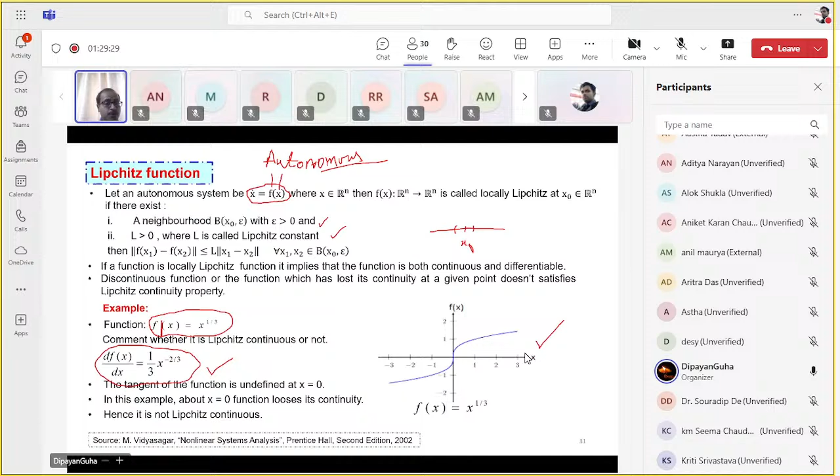Now, before we go into the formal definitions of the Lyapunov approach, let's quickly review some different classes of functions based on which the mathematical descriptions of Lyapunov are formulated. We are starting with class K functions, followed by class L functions, and then class KR functions. If one wants more detail about this Lyapunov study and these types of functions, they can refer to two different references. One is H.K. Khalil and the second one is the Vidyasagar book. These two are very famous books of nonlinear control theory.

So a function is said to be a class K function if it is continuous. Continuous means at every point you can ensure Lipschitz continuity. It is a strictly increasing function and phi(0) is equal to 0. So class K functions are basically associated with local stability attributes. We will come to that in the next slides. But if you ensure your function is a class K function, that means you can ensure the stability of the system in the local sense.

Class L: a function phi, which maps from any real positive number to another real positive number, is said to be a class L function if it is continuous, strictly decreasing, and phi(0) is a finite quantity. So class L is associated with global stability notions.

And another function class in the literature is called class KR functions. A function phi which, in the same line, maps any real positive number to another real positive number is said to be a class KR function if it is a class K function and phi(x) tends to infinity as x tends to infinity, what is called the radially unbounded condition. So you can define a function as a class KR function if it is inherently a class K function and radially unbounded. So this type of class KR function is actually related with global stability.

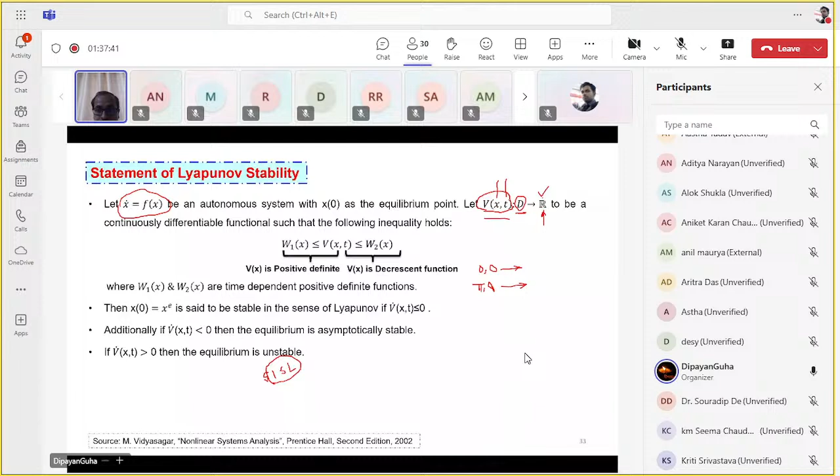So this V(x, t) we are calling a candidate Lyapunov function, which actually maps the state and the time from a domain D to the real line R. The state is a vector quantity, but while you are mapping these states with the help of this Lyapunov candidate, it actually gives you a scalar quantity. So this shows mathematically that this Lyapunov candidate is defined as a function of x, the state, and time, which maps from a domain D to a scalar quantity R. It is assumed to be continuously differentiable and positive definite.

That is demonstrated by these inequality conditions: you have to choose your Lyapunov candidate V(x) to perform the qualitative stability analysis so that it holds these inequalities, that it must be greater than or equal to W1(x) and less than or equal to W2(x), where W1 and W2 are two time-independent positive definite functions. So the first inequality defines that your Lyapunov candidate is a positive definite function, and the second inequality defines that your Lyapunov candidate is a decrescent function. Decrescent function means that its derivative is a non-increasing function.

Then we go for the calculation of the directional derivative, because that is the main foundation of Lyapunov stability. So the first step, you have to choose a Lyapunov candidate which follows this inequality and is a continuously differentiable function.

It must be a positive definite function and a decrescent function. And if you find out the directional derivative of this Lyapunov candidate, or Lie derivative of the Lyapunov candidate, V dot x comma t, that means you are doing the differentiation of this Lyapunov candidate along the state trajectory only. If this directional derivative is less than 0, then you can say this system is locally asymptotically stable at this equilibrium point in the sense of Lyapunov.

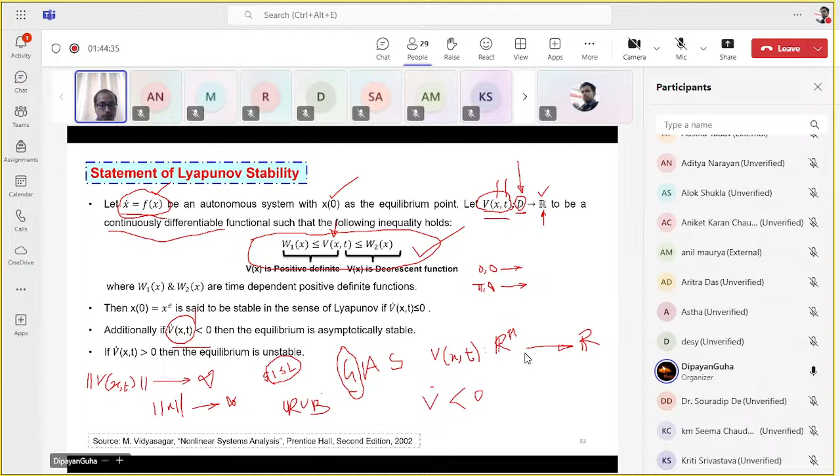So just see whether the dynamics is a function of time or not. If it is a function of time, then it is not uniformly stable. If it is not a function of time, then you can directly comment, yes, it is uniformly stable. Some pictorial demonstration is also given, although these are all very foundational attributes for control system students.

So those participants who are not from the control system background, I request them to refer to the Vidyasagar book or the Khalil book, Nonlinear Control Theory, to have more exposure to the stability notions.

So all these points I have discussed are simply the mathematical discussions or formal definitions of stability. We have talked about uniform stability. I just have to check whether the dynamics of the system, the right side component, is a function of time or not. If it is not a function of time, then directly it is uniformly stable.

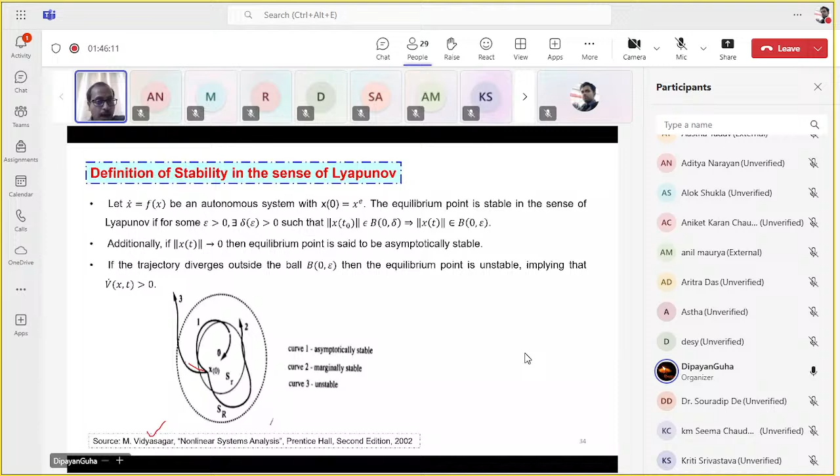Of course, only after the calculation of this directional derivative can we comment. If it is less than or equal to 0, the directional derivative is negative semi-definite, then we can ensure that it is stable. If it is strictly negative definite, then it is asymptotically stable. Or if the directional derivative is positive definite, it is unstable. Unstable means your trajectories go out from the ball or the domain within which you are performing your analysis.

Now, here is one example I have taken from the Vidyasagar book, which defines attractiveness and stability. A second order dynamics is given. As you can see, the right sides of both differential equations do not explicitly have a time component. The states are functions of time, but this f of x nonlinear argument does not explicitly have any time component. It is only a function of states. So uniformity is ensured just by looking at the system dynamics.

Now, if we go for the phase portrait of this nonlinear system, it may look like this figure. If I choose any initial condition within this confined zone, the trajectory goes out from this red ball and the blue ball and eventually converges to the origin. This is the stability we defined in the sense of the epsilon-delta definition: if you choose any initial condition within this delta ball, the red ball, and ensure the trajectory remains within the epsilon ball for all future time, it is a stable system.

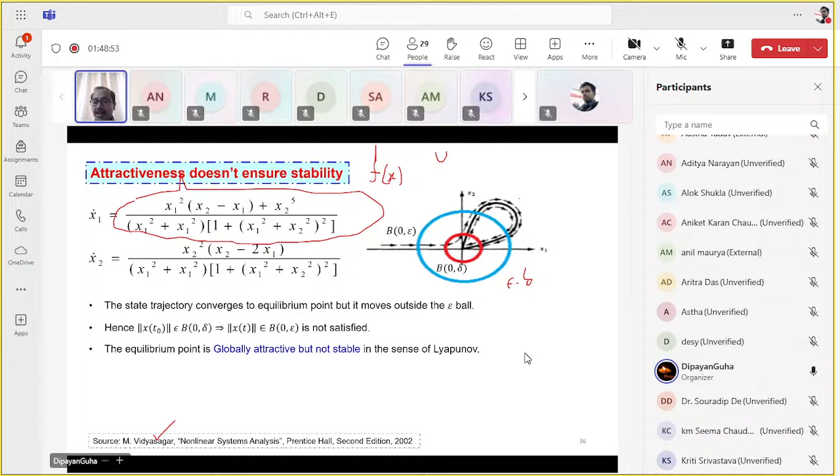If the trajectory goes out of this blue ball or epsilon ball, then the system at that equilibrium point is said to be unstable in the sense of Lyapunov. In this example, whether you take the initial condition within the red ball or outside it, the trajectory goes out of the blue ball, even with oscillation, as with exponential functions. So that's the formal definition of the states.

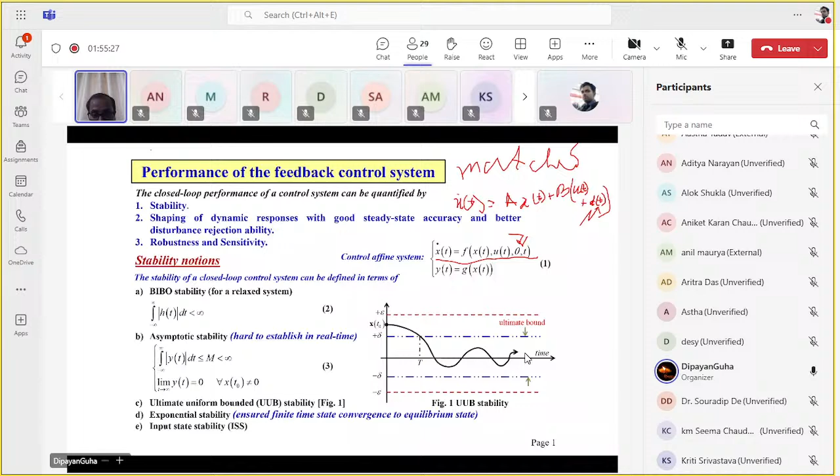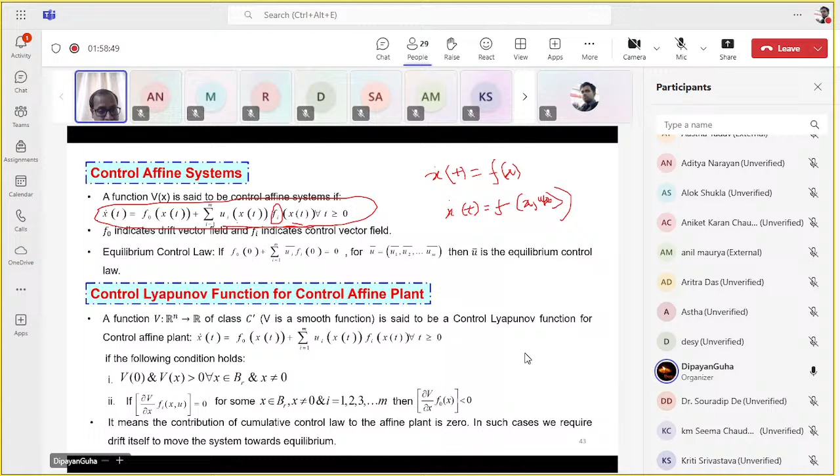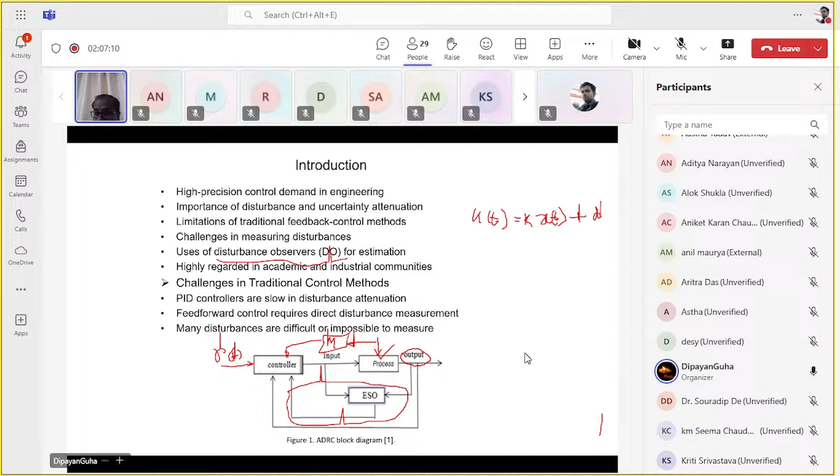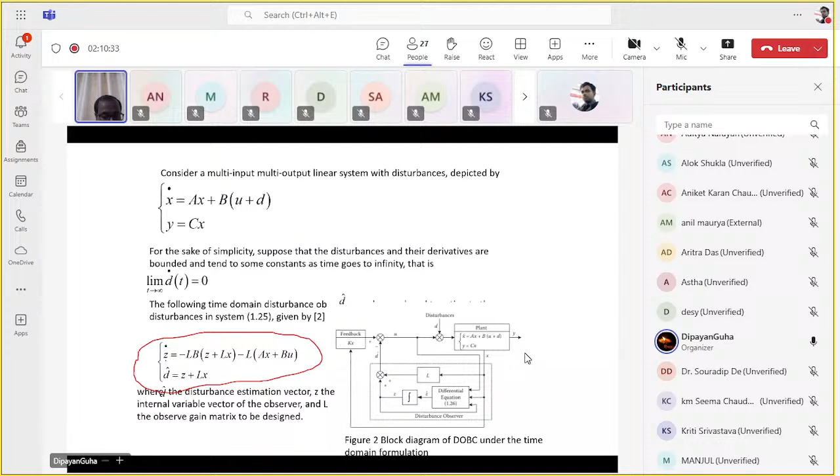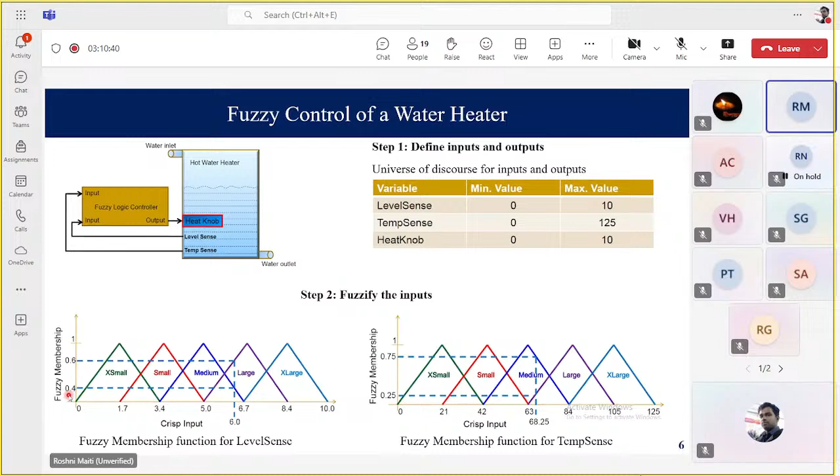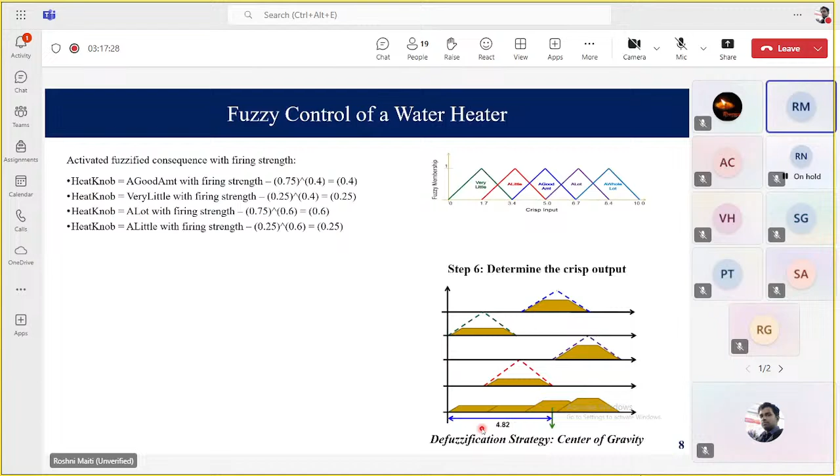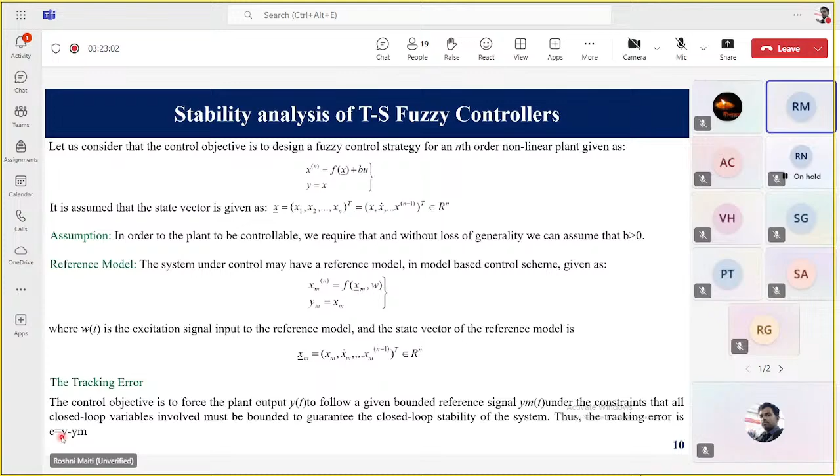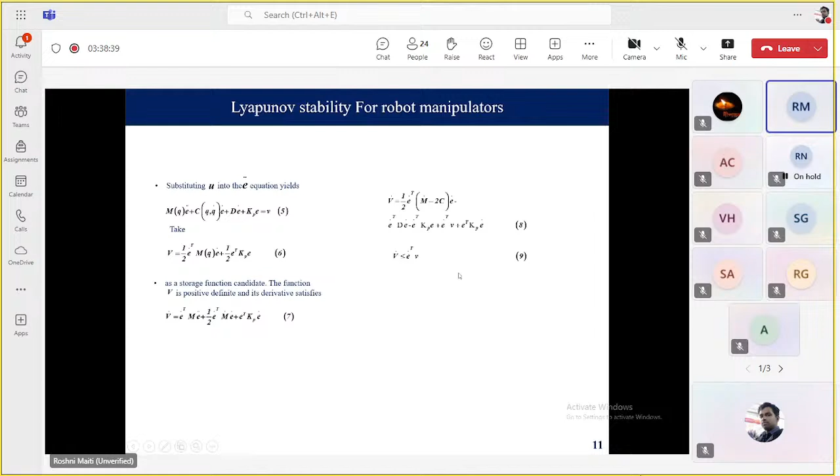Nonlinear system error, E is equal to Y minus Ym. So we have generated the error about the nonlinear system, negative definite matrix equal to E transpose. Other types of systems, different kinds of controllers. Two-link robot manipulator, to show V dot, the control law as this. Three terms of function. We have given these values.

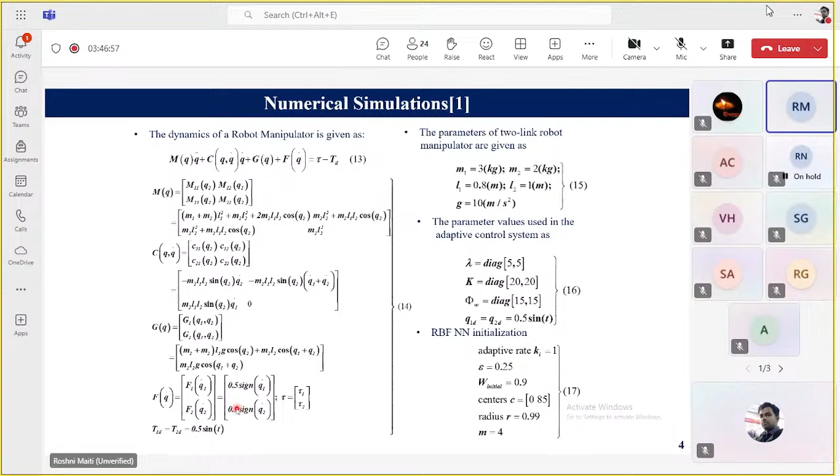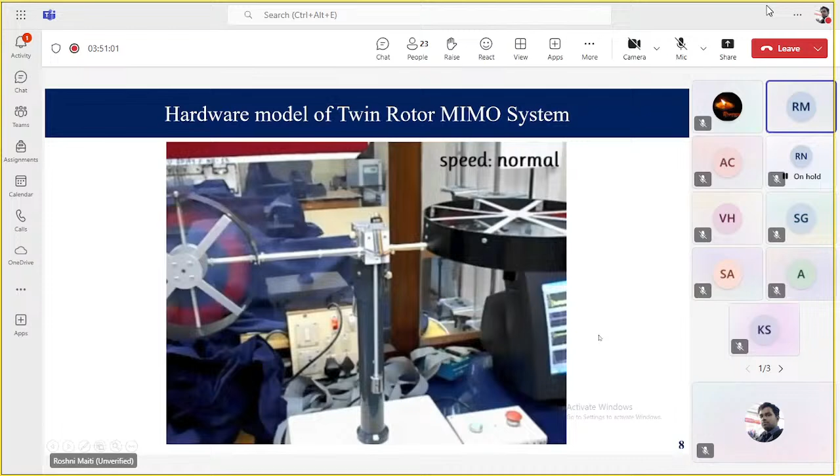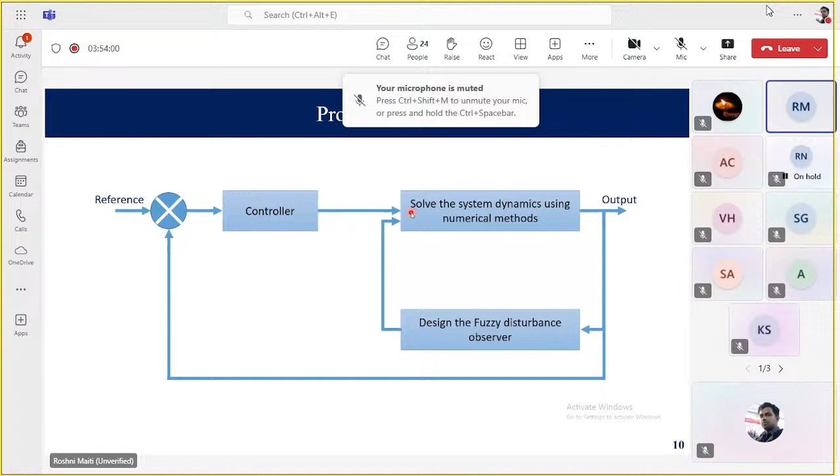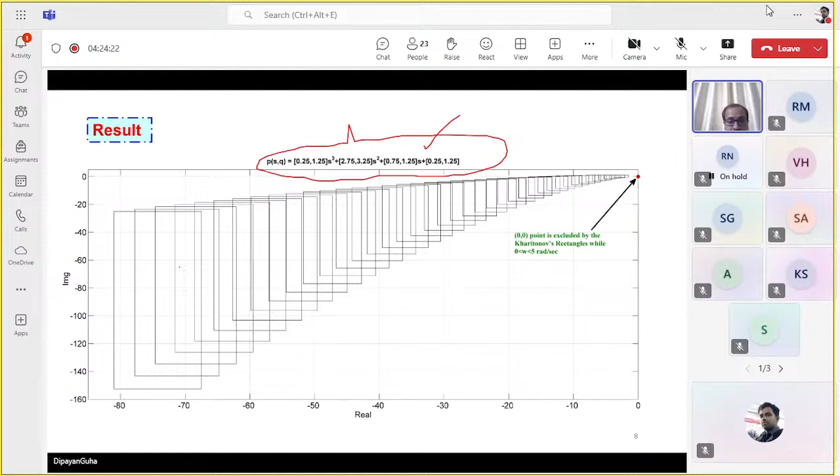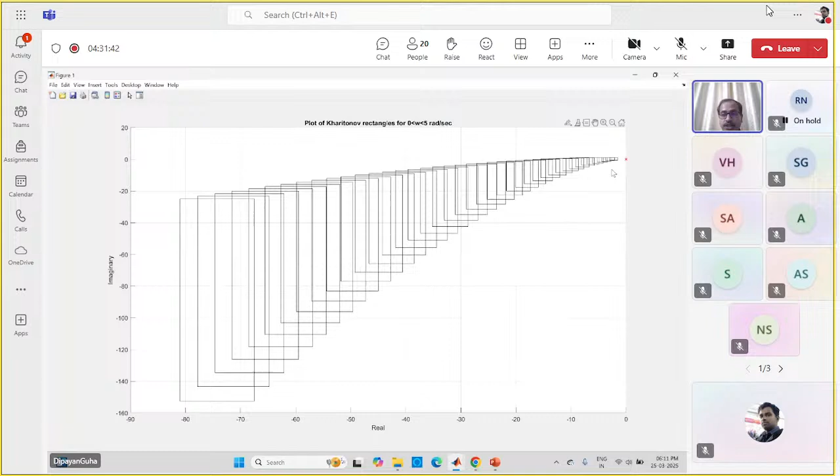We will define the 4 Kharitonov polynomials. You can have your own choice, choose individual frequency. In the tuning aspect, this again is a hit and trial method only. Am I right, sir, in understanding?

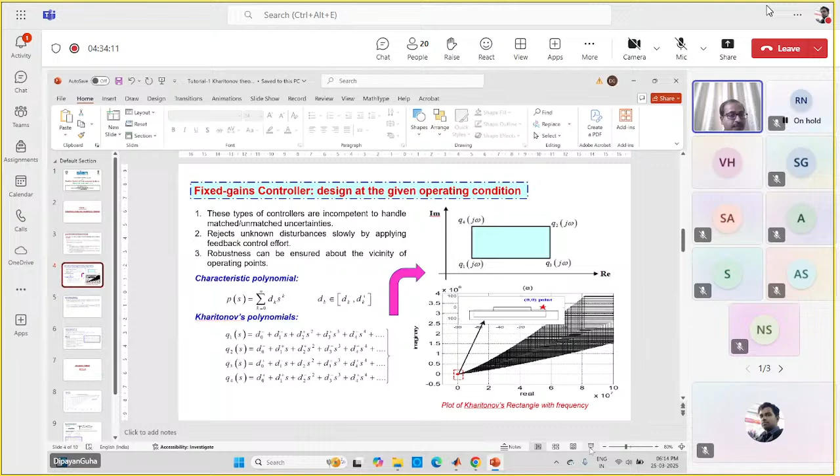So far, I don't know whether you followed the slide or not. It clearly mentions that we are talking about the fixed gain controller. I mentioned it somewhere, yeah. It is a fixed gain controller that I have taken into account. There are 2 ways of defining the tuning. The number 1 is that

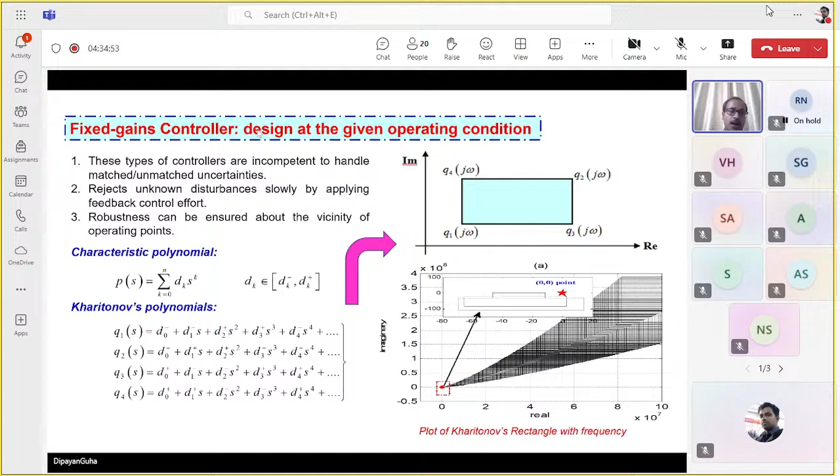beforehand you have computed the optimized value of your controller parameter by conventional or classical approaches like Ziegler-Nichols and all. Whichever method you apply for finding out the controller settings, those settings are fixed. They are not a function of time. Okay, so once you have tuned the parameter, that's why I said in that second problem that we calculated the range of K for which the system is supposed to be robustly stable. That we calculated well in advance. And within this range, whatever value of K I fix there, the system is performing robustly stable. So this is one way of defining the tuning.

And the second way of defining the tuning is what we famously consider as adaptive control. Your parameters are automatically updated based upon your measurement or environmental conditions. That is also tuning. But in that case, your parameter is not fixed. It is time-dependent. Whatever measurements or environmental situations you are getting, in order to attain stability, your controller parameter has to be changed or updated or tuned. So that is another way of defining tuning.

So if you are dealing with the fixed gain controller, then it is assumed that you already have well tuned your PID parameters or PI parameters or P parameters, and then we derived the characteristic polynomial. Are you getting my answer? Fine, sir. Okay, sir. Thank you.

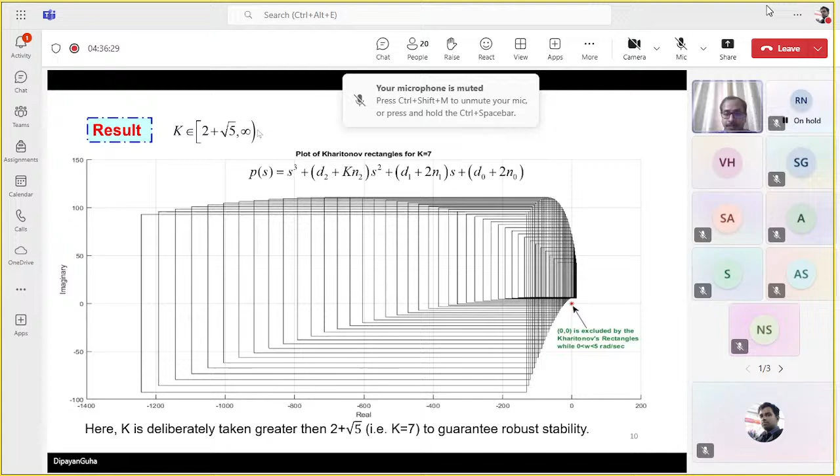Anything else? This is only testing whether your control system is robust or not. So while you are going for testing, it is assumed that you already have designed your controller. That means the tuning part is already done. Got it. Correct, sir. Got it.